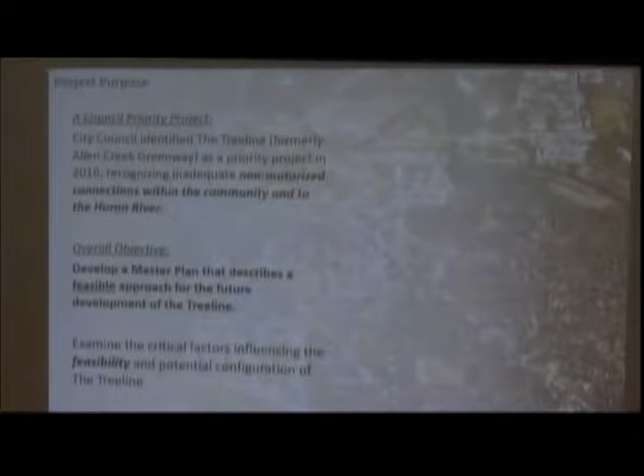What's different about this process is in 2016, City Council identified this as a priority project. They heard loud and clear from the community that this was a priority to improve non-motorized connections from the river into the downtown, into our near neighborhoods, down to the South Athletic Campus. They decided as a body to make this a priority project, put some funding towards it, and charge staff with creating a team to look at the feasibility of an approach to make this alignment go from one end of town to the other. We did a deep dive on this.

We did a lot of analysis the first year to really understand the corridor. We came into the project with a real strong community vision, but we hadn't really had the resources to understand how feasible this is to actually happen. So we're going to talk about what makes this feasible and all the steps we went through to get there.

So just a little bit about the project study area and the context. First things first, north is to the right, so that's different than most maps you see. The map you're holding in your hand, north is straight up, so two different orientations. But what you'll see up here on the screen is north to the right.

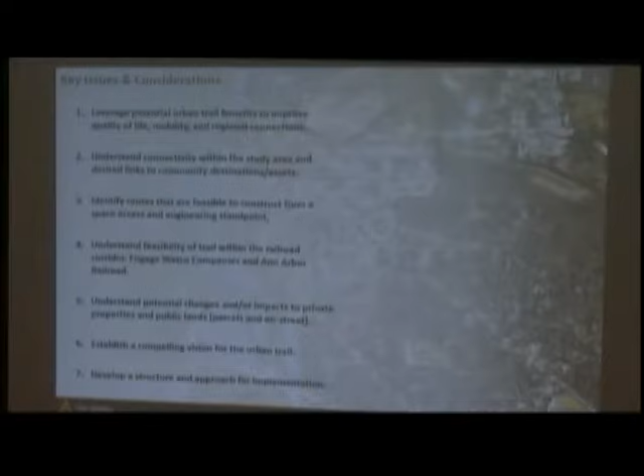So we've thought about a lot of key issues, and right from the very beginning of this project we knew that we wanted to improve quality of life in the community. We wanted to improve mobility options so that you don't always have to use your car to get from one end of town to the other. I don't know how many of you see the people walking down the rail corridor on game days. There's a real desire to get from downtown to the South Athletic Campus, but there's not a good way to do it. So we took a look at that.

Understanding connectivity within the study area and other community destinations, like the neighborhoods and parks and the border-to-border trail, making those connections. So this idea of non-motorized trails in the community is really catching on.

We're making a lot of progress with trail connections. We now have a trail connection that goes out to Matthaei Botanical Gardens at the end of Fuller Park. If you haven't been on that one, it's just newly opened and it's fantastic.

So that's making a connection to the border-to-border trail. We're working with the county to make a connection from Bandemer Park all the way out to Dexter and beyond. And all of this also connects to the state's vision of a statewide connection from Belle Isle to Ironwood, which is up in the very west corner of the Upper Peninsula. It's called the Iron Belle Trail.

So this would be the in-town piece of this broader regional connection. And that's why I think it excites the community so much, knowing that there might be the opportunity for non-motorized connections within our community outward to other communities as well.

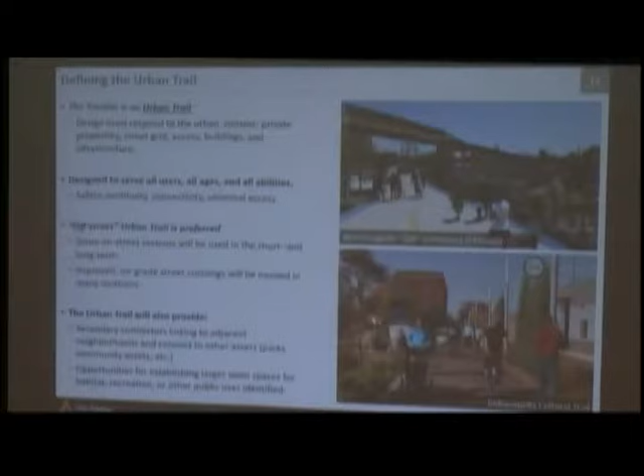Okay, so a couple big things to talk about. First, as Connie mentioned early on, this project started off being called the Allen Creek Greenway and has shifted through a branding effort that the Conservancy helped lead to be called the Treeline and identified as an urban trail. And I think that's an important distinction to recognize.

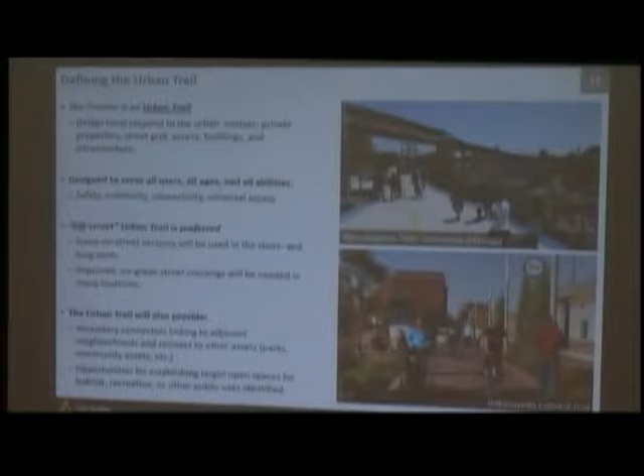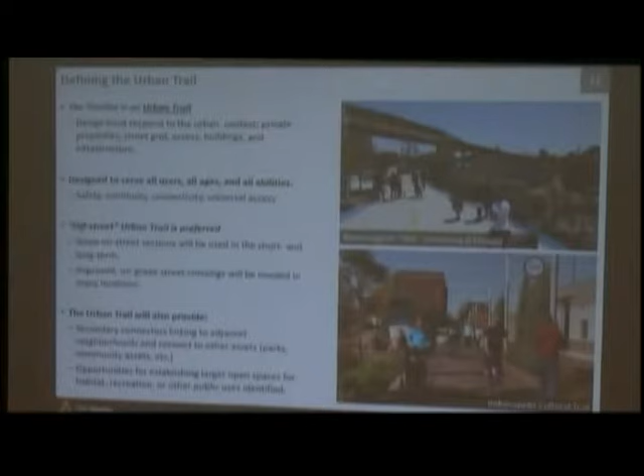While the Greenway had very good visions and still has very excellent ideas to continue to transform the Allen Creek corridor, our charge, as Connie said, was really to find that feasible route that makes that non-motorized connection. And as we talk about the framework, you'll see that this route that we've identified, there's a lot of opportunity to build other projects and other things onto that, whether that be green space or stormwater projects or a variety of other things. So we'll get to that.

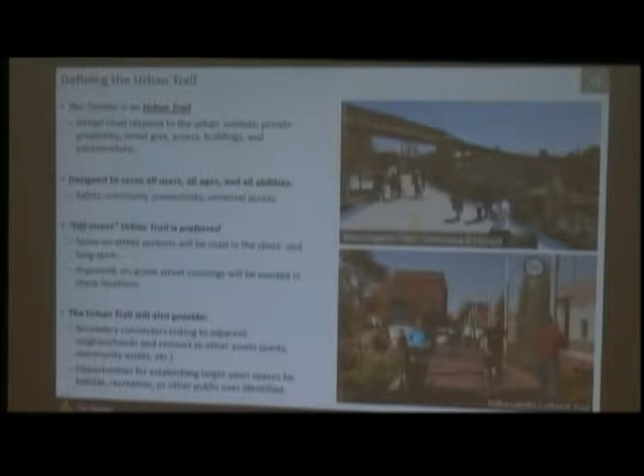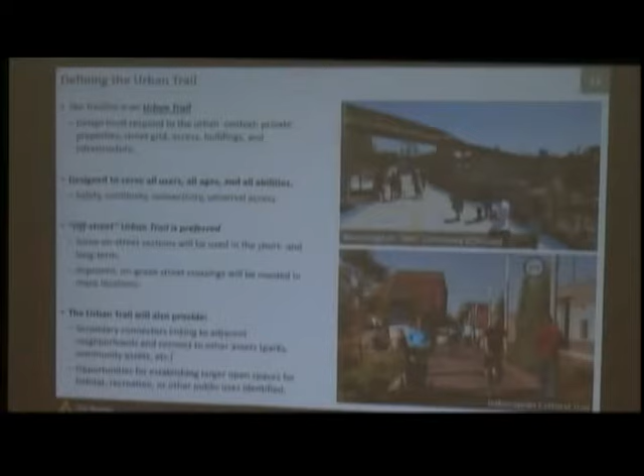Continuous experience is really critical and important to everybody involved—trail alignment to the extent possible, the trail side as well, secondary connectors, other ways of feeding and tying people into it, as well as opportunities for other green spaces or natural areas to be created along the corridor.

Throughout the process we've had a lot of questions. Sorry, I need to do this—battery change. There we go, is that better? A little bit, okay.

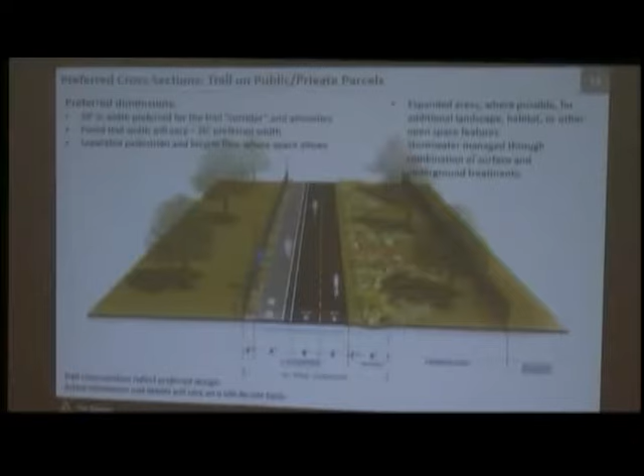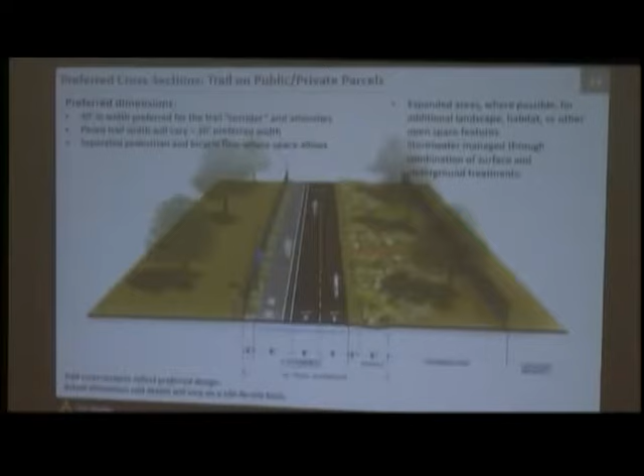As for the trail itself, generally this is envisioned to be about a 30-foot wide corridor, our preferred width. Up to maybe 20 feet of that could be pavement, including a separation of uses so bicycle traffic would be separated from pedestrian traffic. We've heard quite a bit in the community that many existing trails have conflicts—during busy times you get people going fast on a bike, other people with strollers, and there's a lot of conflict there. So having something wider is pretty important. The remainder, about 10 feet, can be used for landscaping, benches, furnishing, and lighting.

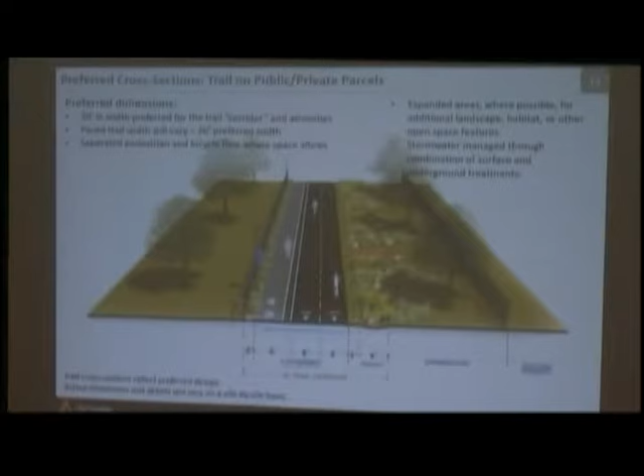Where we're able to get more access to property, there's certainly interest in expanding that and creating more green space or other amenities along the trail. As Connie mentioned, a lot of the prior plans have talked about utilizing the railroad corridor for alignment. A couple things to understand about that as we think about what we're trying to achieve from a design standpoint.

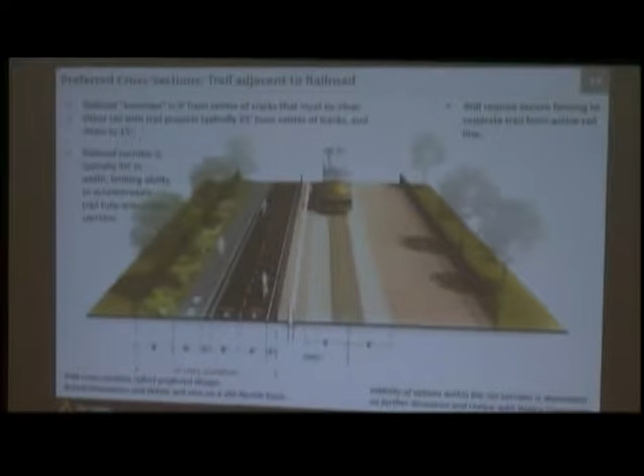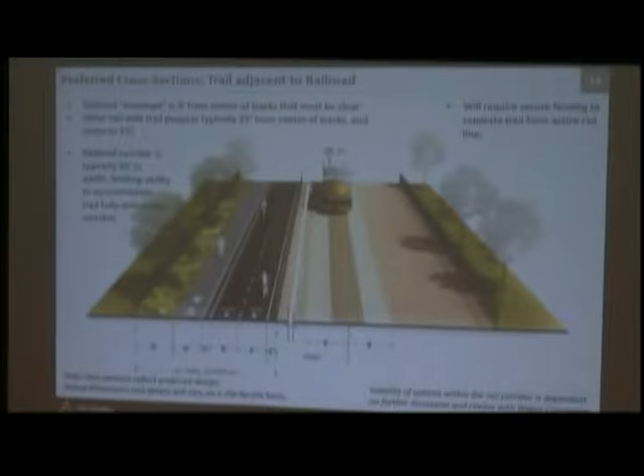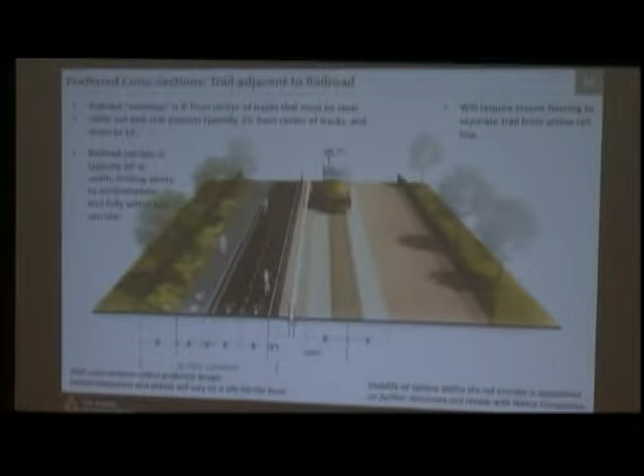The railroad corridor is generally about 50 feet wide, with the railroad tracks right in the middle. Doing the math: you need 8 feet of separation from the center of the track to either side, to be clear for trains. That leaves only about 16 feet on either side of the tracks for a trail—but we're talking about maybe 20 feet of pavement alone, let alone space for landscaping. It just doesn't fit. So looking at that, and meeting with the railroad company about their concerns...

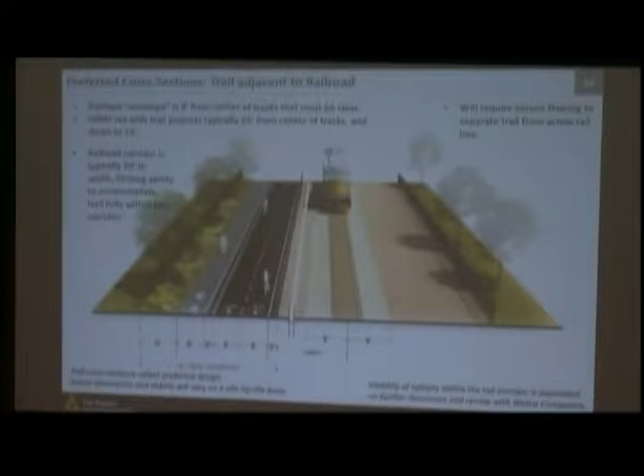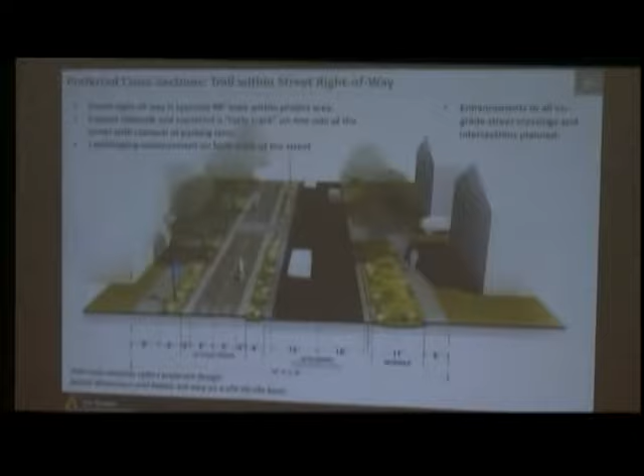You'll see reflected in the alignment a shift towards utilizing more public and private property that's often parallel to the rail corridor, sometimes encroaching a little within it, but generally outside of it in most locations. There will also likely be some on-street sections where the trail is on-street, with wider sidewalks and separated bicycle facilities or cycle tracks. This would largely require removing parking on at least one side of the road where it's built, but would also provide room for additional landscaping and stormwater management along the roadway.

The framework identifies a number of bridge crossings over some of the major roads. Within that 30-foot wide corridor, you could have a ramped section that provides a more gentle ramp rather than going up and down a flight of stairs over a bridge. It's a much more gradual ramp, so if you're biking or running, you have that continuous experience up and down. These would also provide a parallel sidewalk connection from the existing street sidewalk down to wherever that ramp meets grade, so you have a point of access to get over bridges and things like that.

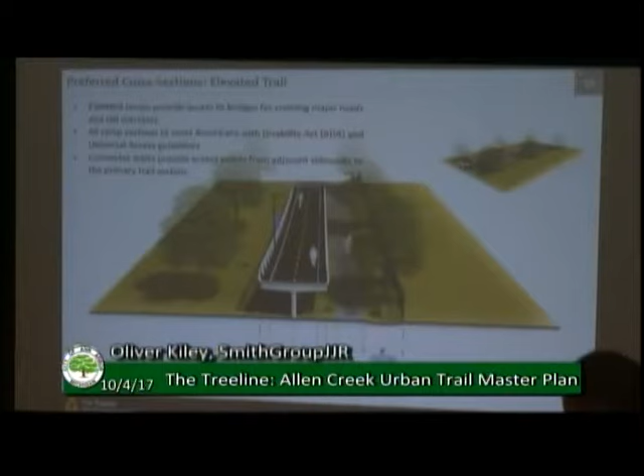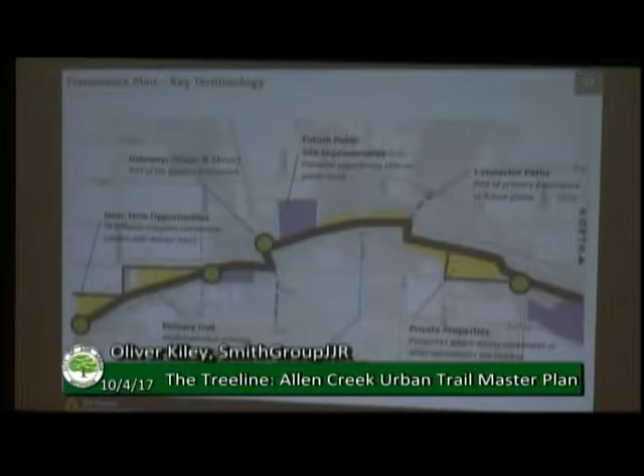The framework plan itself, there's a big version over on the boards, and we'll walk through it in more detail on the next slides. But there's two things I'll point out: big fat lines, which we're calling the primary alignment, that's the main stem of the trail, the 30-foot wide corridor. And then some thinner lines, which are near-term or alternative connections we want to keep in our back pocket. As one phase is built and we need to make a connection, there may be opportunities for near-term improvements to streets while we wait for those primary sections to be built.

So a couple of things, we're going to zoom into this map, don't worry. So there are five key things that drove the determination of this alignment.

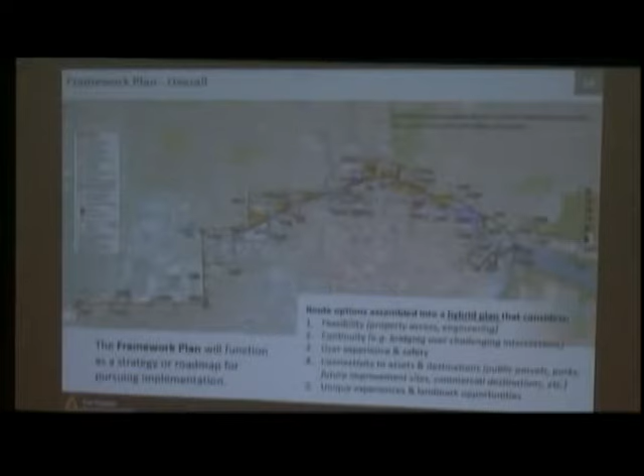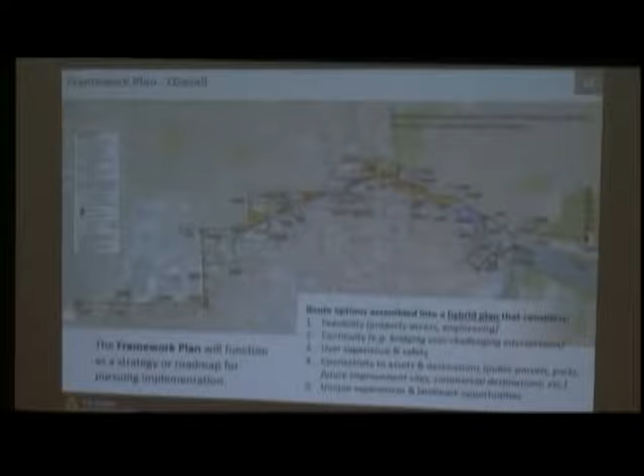As Connie mentioned, feasibility was the number one. So other than a handful of property owners, our team, working with the Conservancy, reached out and met with almost every property owner where this alignment is shown. We asked them, are you comfortable with this alignment being shown on your property? And for everybody we met with that has a route through their property, they said yes, recognizing there's a lot more conversations that need to happen as implementation moves forward. Whether a property gets purchased or the city just gets an easement, or some other change happens, that all has to be worked out, and the detail and exact design of the trail has to be understood in more detail. We've conveyed that to property owners as well.

The second piece, the big driver, was again trying to have that continuous experience so that people on the trail have lots of points of access, but when you're on it, you can just go and don't have to stop regularly. That ties right into the user experience and safety point, so we're really trying to use this trail to provide connections over some critical safety areas in town.

Getting over North Main Street, for instance, is a big one. That's a very congested area by North Main and Depot, not very friendly for pedestrians, so providing people a way to get through that is good. Being able to connect to community assets and destinations, Connie mentioned many of those earlier. And then also being a little bit visionary too, if we're going to make the investment to build this, are there opportunities to do something really unique and special along the way that creates a strong experience or a landmark for the community that becomes a source of pride and identity.

Okay, so we're going to go through a review of the framework plan in eight movements here, for those with a musical mind.

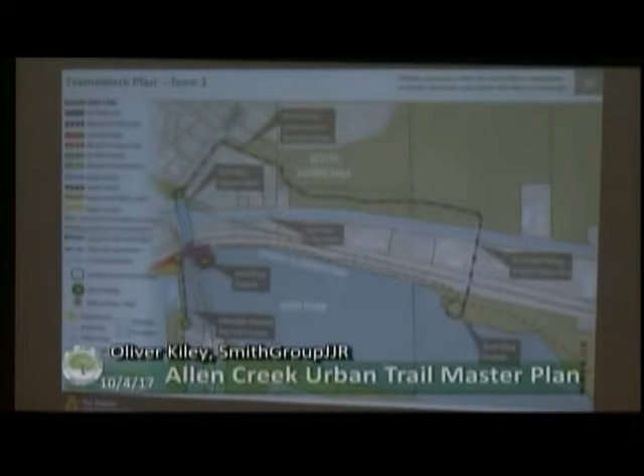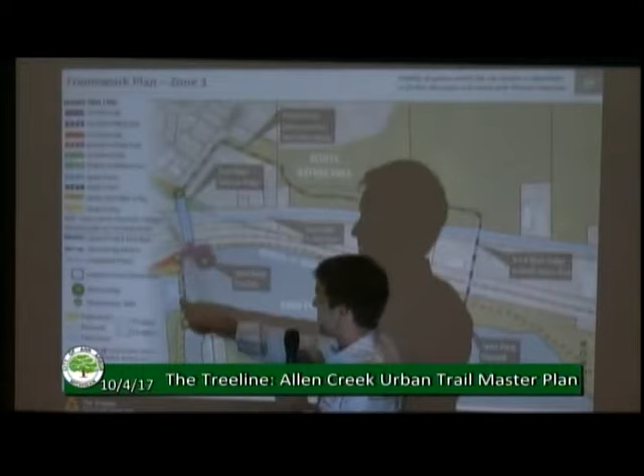Okay, so this is starting at the north end at Argo Pond, and just to orient you, this is where the Argo Dam is, and this dashed line is the border-to-border trail. I'm going to shift down and talk about the primary alignment more on the next slide. I'll just mention this one.

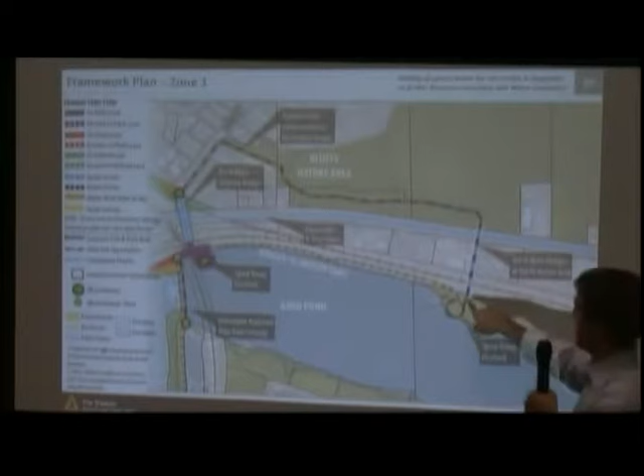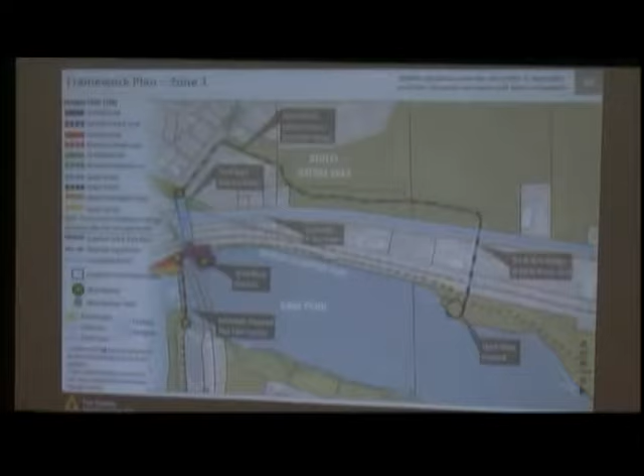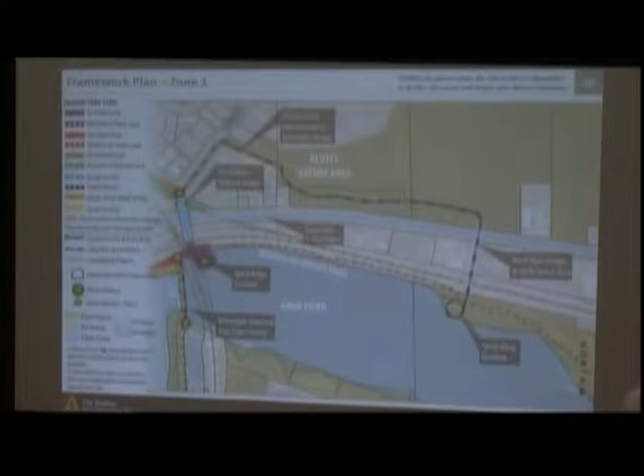This is where we have some of these thinner lines, an example of a near-term or alternative route we wanted to keep in our back pocket. This was the idea of connecting through Bluffs Nature Area. We met extensively with Natural Areas Preservation, as well as some of the mountain bikers that use that area, to figure out how that might work. But there's a tentative or potential alignment through there with a bridge, an elevated ramp section over North Main Street and over the MDOT rail line, down into Bandemer Park. That's one option should our preferred approach be infeasible.

So I'm going to start here. This is where Argo Dam comes across the existing border-to-border trail.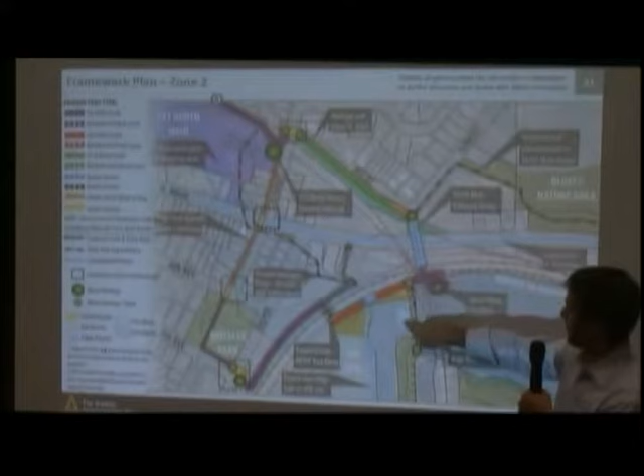What we're proposing is a ramp of some kind. The images speak to a spiral ramp idea, though there are other ways it could be designed. That would connect from the border-to-border trail over the MDOT rail line, over North Main Street, up to the corner of Wildt and Sunset.

From there, the main trail would follow along Wildt Street, parallel to the railroad tracks, mostly within the street right-of-way. We would cross Summit Street and then go into 721 North Main, a city-owned property, connecting along its west edge.

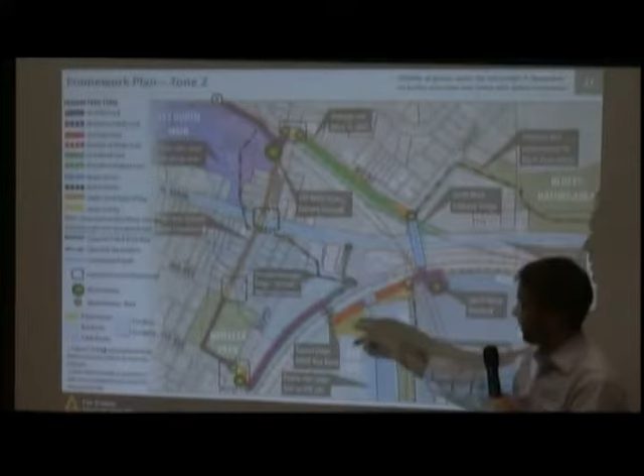There's another section of the primary trail currently in an engineering phase. You may have heard reference to the berm opening project, a floodplain management project to cut a stormwater tunnel through the MDOT railroad berm. Part of that project now looks to add a secondary tunnel for pedestrian and bicycle use underneath that railroad bridge, providing a connection to the border-to-border trail.

This comes out right by the Amtrak station on Depot Street to the east, so that's another gateway point to get people in. We've had some questions about why we'd do both of these.

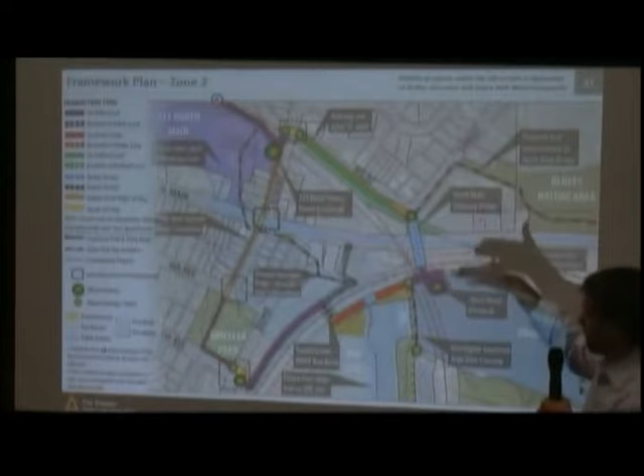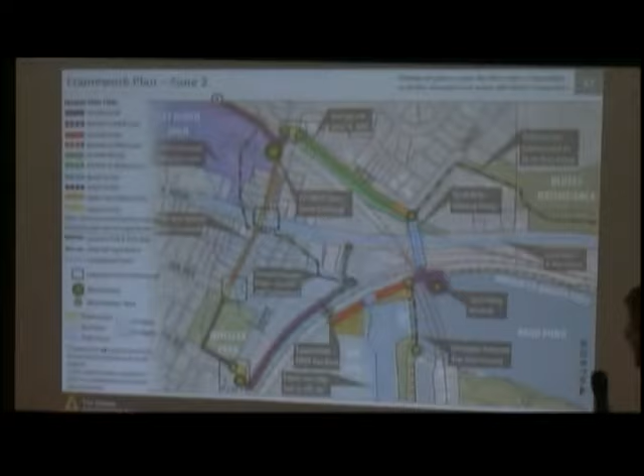One reason is that North Main Street is a very difficult road to cross. If people are coming from the east or southeast and want to get on the trail, you don't want to force them to come across here. This is a really great way to pull people in and get them on.

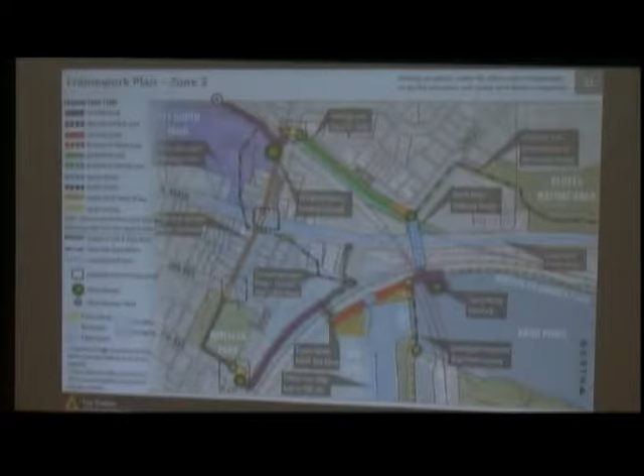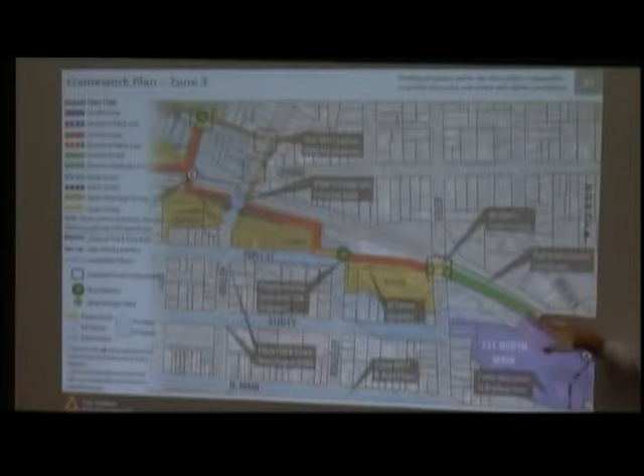Then the main branch heads south. This is the messiest page of all of these, so it gets a little easier as we go. Again, this is the connection down through 721 North Main. There's an old rail spur that runs behind, where the Ann Arbor Distillery is, and it comes down to grade at Felch Street here.

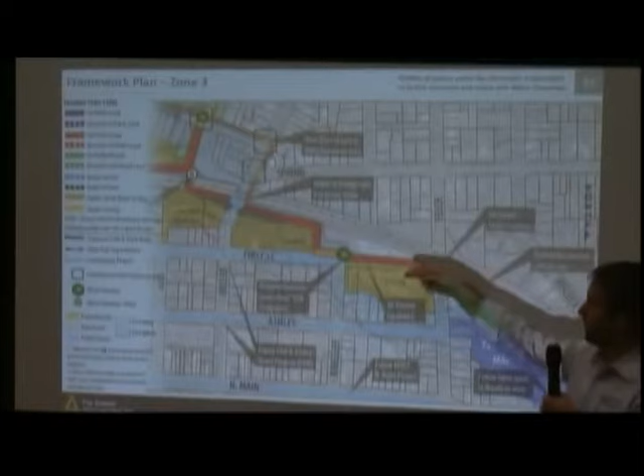We cross Felch, and this is Kingsley Condos, which has just started construction. Part of the site plan review process for that got a 30-foot wide easement for the Allen Creek Trail, the Treeline.

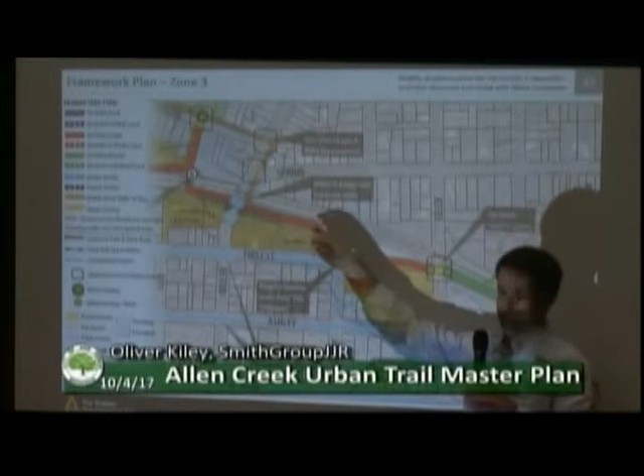I'm going to do that a bunch of times tonight, so you can laugh each time that happens. Anyway, for the Treeline we got an easement secured, so that's a piece where we already have property access. There would be a small on-street section, and then we'd utilize private property to bridge up. The dashed lines mean where it switches from on-grade to a ramped situation.

So we ramp up and bridge over Miller Street and then come back down to grade. There's been a lot of conversation about Miller—do we really need a bridge there? The rationale is that Miller Street comes downhill in both directions.

That's visibility issue one. There's a railroad bridge that blocks visibility—that's number two. And the road has kind of a kink in the direction as it changes—that's three. It's a nasty area to try and cross as a pedestrian during rush hour, so being able to bring people over that, we think, is a good way to go.

On the south side of Miller, we're looking to tunnel through with another pedestrian tunnel underneath the railroad bridge and berm, onto the west side. From there, we'd go through private property with a connection west into West Park with a crossing point, tying into the West Park trails and bringing people in.

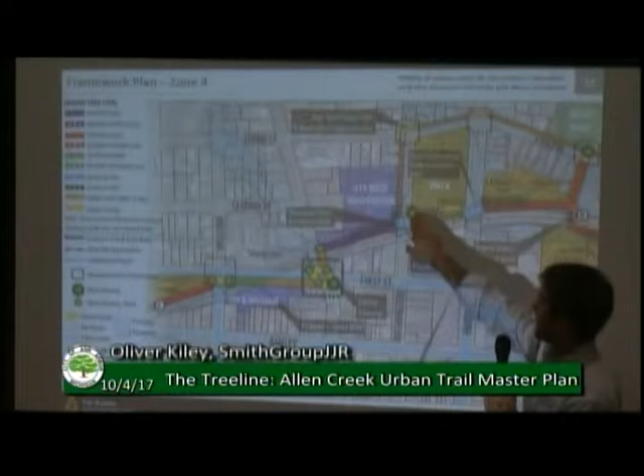The main branch continues south through here, ramps up, bridges over Huron Street, stays elevated but with some ground level access points, stays elevated past the YMCA, and as it approaches Liberty, the railroad tracks come back to grade. The trail follows that elevation and comes back to grade right at Liberty, where Liberty and First Street becomes a key on-grade gateway point.

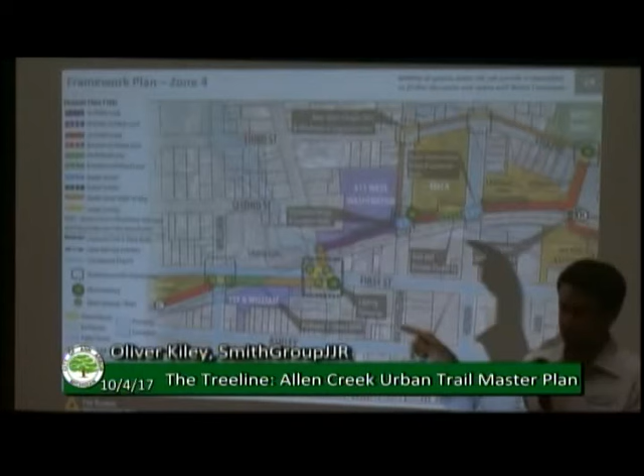That's probably the busiest road we're not crossing with a bridge, and that was deliberate, to make a strong statement for people driving into downtown. That was the closest point and a really strong point to do that.

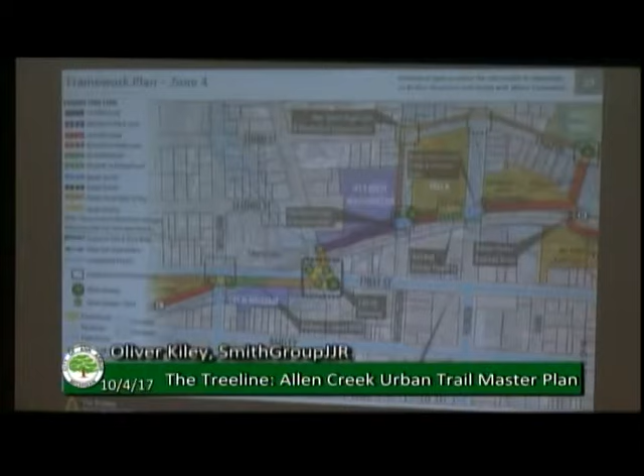The route then stays on First Street, crosses William, and goes back onto private property as it heads south through private property out onto Ashley.

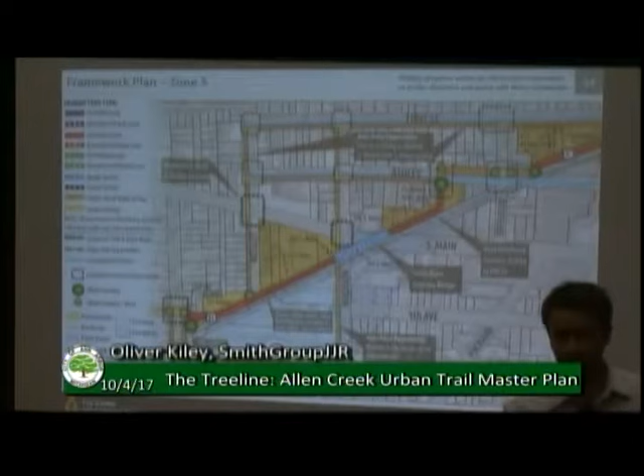It's on street for about a half a block. A new mid-block crossing would be built, and then we bridge up and ramp over Madison and Main Street and South Main Street, dropping back down to grade at Mosley. As part of this construction, the city got a 15-foot wide easement for the trail, which combined with a small sliver from the railroad property gives us enough to build the trail through there.

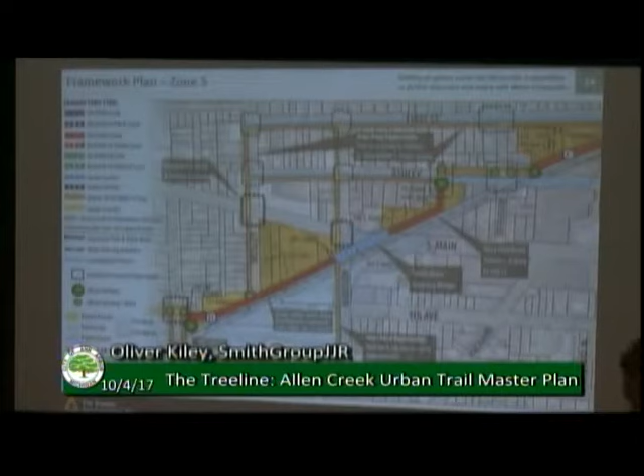It then goes on grade through property out onto Hill Street. From Hill, there's a new crossing improvement at Green out to this intersection, which could be improved. This is a massive intersection at Green and Hoover. Once we clean that intersection up, we'd go east down Hoover on street to State Street, then head south towards Stimson.

Even though these are on-street sections, one key improvement we can link in is improving those pedestrian crosswalks. In the South Burns Park neighborhood, a lot of students, faculty, and residents try to cross State Street, and during busy times that's a challenge. So improving that corridor isn't just about moving along it, but crossing the street is important too.

This would continue south to the ending point at State Street and Stimson, down where the Salvation Army is, just south of the Stadium Bridge.

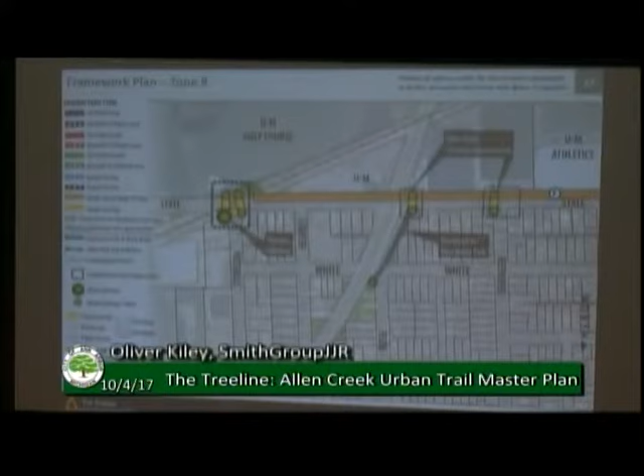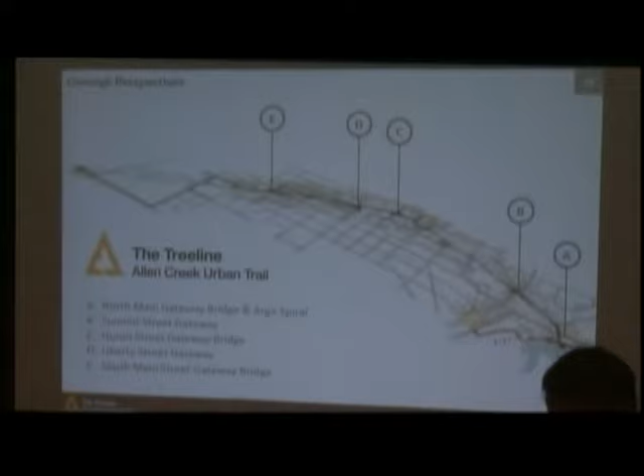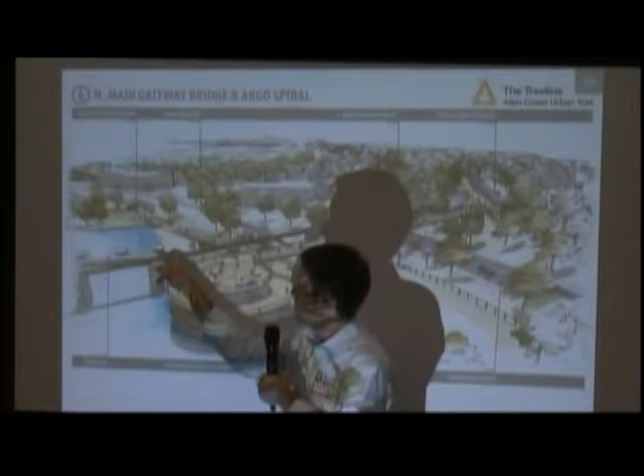I'm going to go through these fairly quickly. These are some illustrative drawings showing what the trail could look like. Point A is looking at the trail up by that spiral ramp in Argo Pond that crosses over the MDOT rail line, crosses over North Main Street, and connects up to Wildt Street at Sunset. Then this would be the border-to-border trail down at grade. Here's the Argo Bridge, Argo Dam, and then that bridge with the tunnel underneath the MDOT rail line—that's a shot of how that could look.

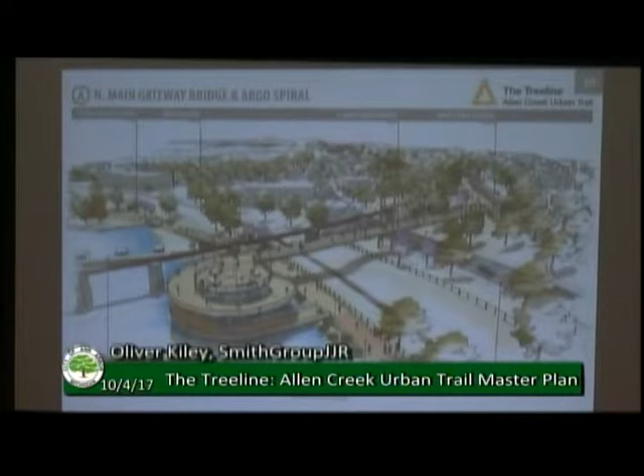One idea is that these gateway bridges could be signature elements depending on how they're designed, appearing in similar or different ways at other key crossing points and gateways into town.

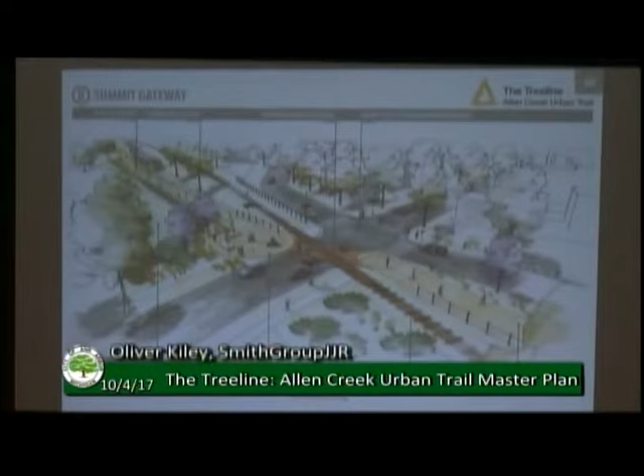This was a smaller node, looking at the Summit Street and Wildt Street intersection. The main branch of the path would come through, cross the street, and then go through 721 North Main Street.

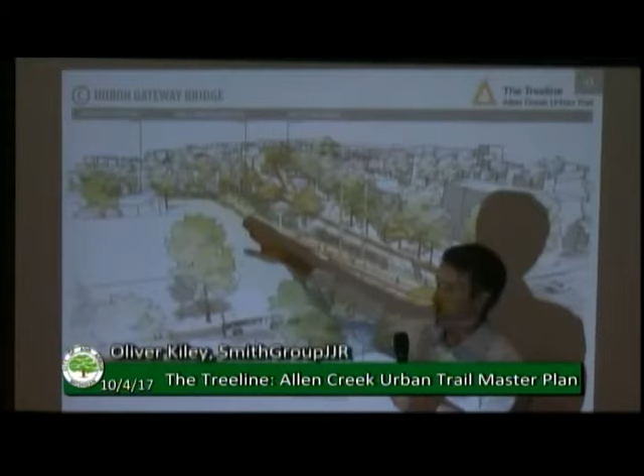This is the bridge if you're up on the track at the YMCA looking north, kind of out of the window—this is what you might see. This is Huron Street down below with a bridge crossing over Huron. In some cases there may be stairs to provide access; this could also be a sidewalk or ramp that ties back in. That's something that will be worked out from a design standpoint in future phases. You can also see a connection on the left out to West Park and the Miller Bridge a little bit in the distance.

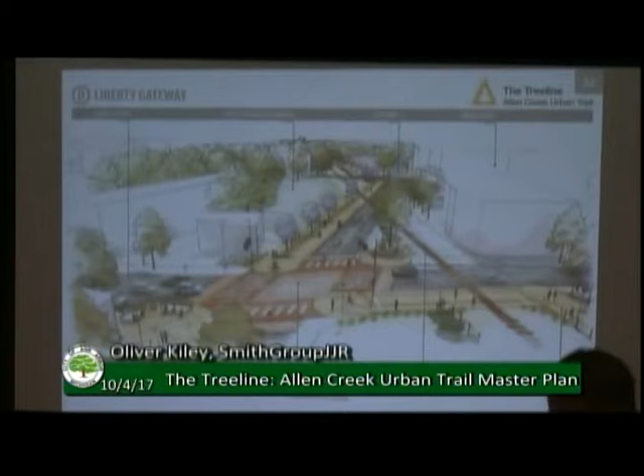Here's an idea for that on-street section and gateway point down at Liberty—starting to take that street intersection and make it feel more like a pedestrian-oriented space. A lot of communities are building raised crosswalks or raised intersections with special pavements and other treatments to make them very safe for pedestrians and slow drivers down. There's a variety of designs for that.

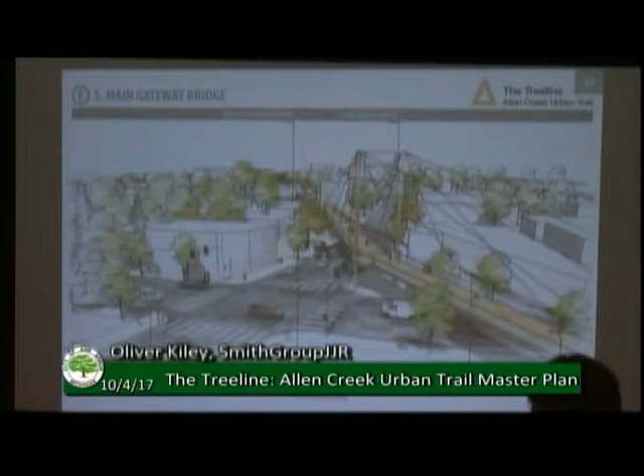Lastly, the bridge looking north at South Main Street at Madison. That bridge comes up and articulates a few times as it moves through that area to avoid buildings and things like that.

Okay, a few more slides just on the implementation side of it, and then we'll be done shortly.

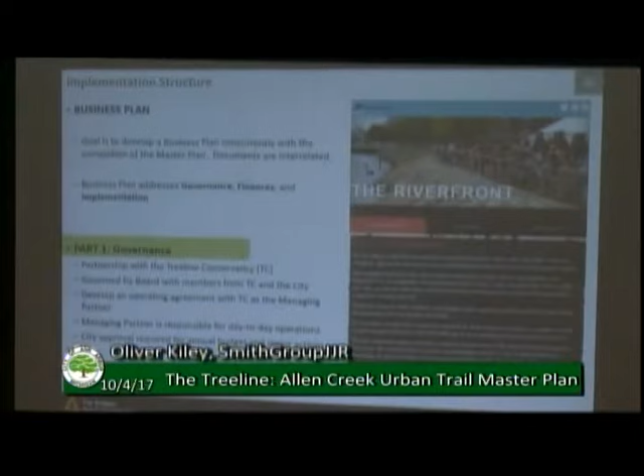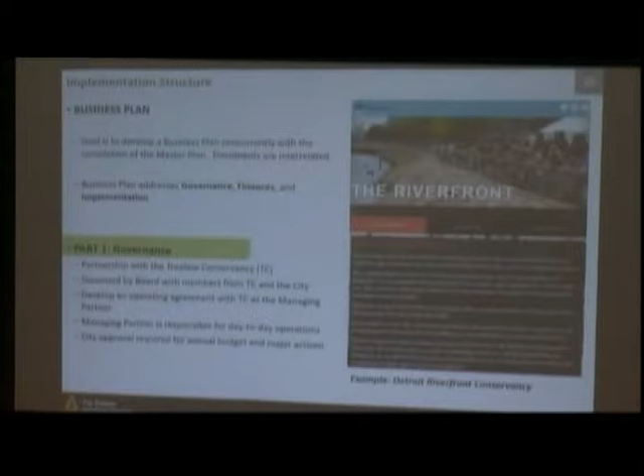As Connie mentioned, the Treeline Conservancy is working with the city to figure out a partnership arrangement and put together a business plan for how to execute this vision and make the Treeline happen. This is very similar to how many other major urban trails in other communities are built.

Closest to home is probably the Riverfront Conservancy in Detroit, which was responsible as a public-private partnership for building the Riverwalk along Detroit. Subsequently, they started building the Dequindre Cut, a couple mile long non-motorized trail connection to some key destinations in Detroit. In that situation, the Riverfront Conservancy was responsible for fundraising, design, and engineering, and they have operating and management agreements and requirements for how to manage and maintain it.

The city and the Treeline Conservancy are looking to figure out the set of roles and responsibilities that the Treeline will play in making this vision happen. Part of their business plan is this governance structure piece, which identifies the roles and responsibilities of the city versus the Treeline and how that works.

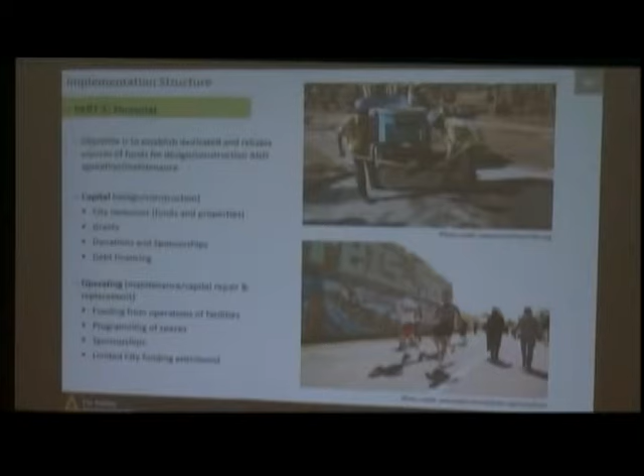A second component is the financial side, thinking about not just the capital cost needed for construction of the different phases of this project, but also the ongoing operational costs. Who's maintaining it, who's managing it, who's paying to keep the pedestrian lights and street lighting going along it? All of those kinds of things need to be considered in this business plan.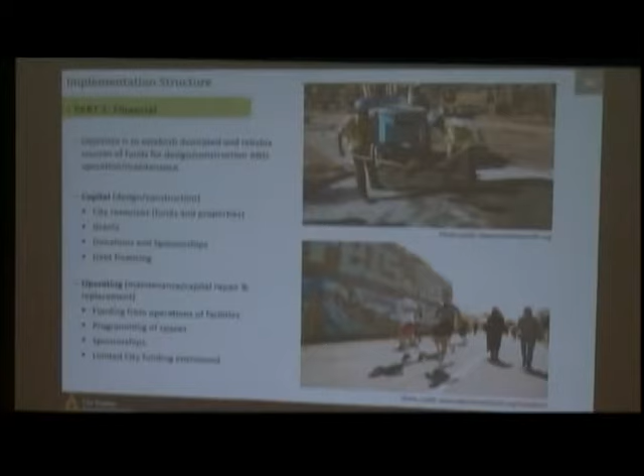That said, the Treeline Conservancy is looking at a very broad range of funding opportunities for this. It could be grants, donations, sponsorships.

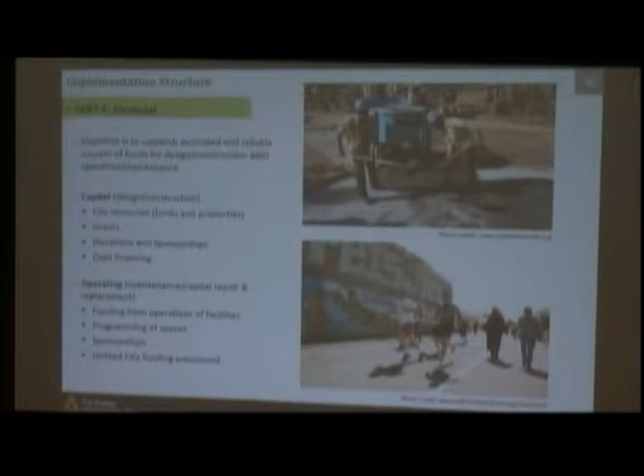I've lived in Ann Arbor my whole life, and I can say Ann Arbor doesn't have a strong history of asking for money as a community to fund projects. When you look at other communities like Detroit or Grand Rapids that fund large public projects, it really takes a lot of different interests, constituents, and groups pulling together to figure out how to do it.

So those details aren't worked out yet, but those are the things the Treeline Conservancy will be looking at.

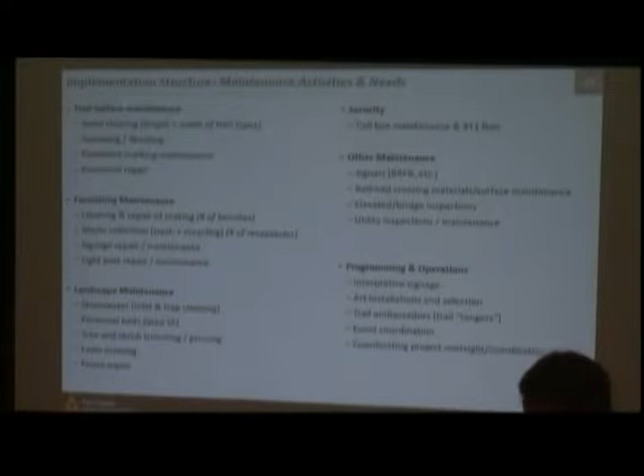This is the most boring slide of the evening—very important, but I'm not going to read through these. Suffice to say, there's lots of management and maintenance kinds of things, enforcement, all that stuff that needs to be considered in this plan. And then lastly, it relates to the implementation strategy.

How is this really rolled out? How is this process phased? We recognize that building this whole trail, about 2.7 miles long, is a lot to bite off in one piece. It'll very likely be phased in increments. So what does that phasing strategy look like?

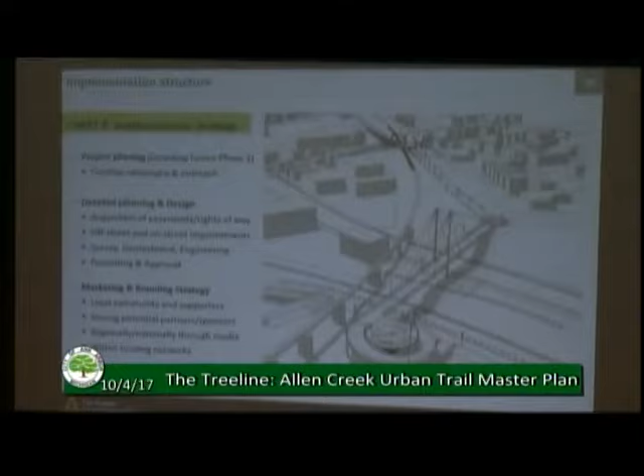Again, it means reaching back out to property owners and figuring out, here's what we're proposing, here's a more detailed idea, how do we come to an agreement with property owners. That's all part of the next phase of implementation and moving that forward.

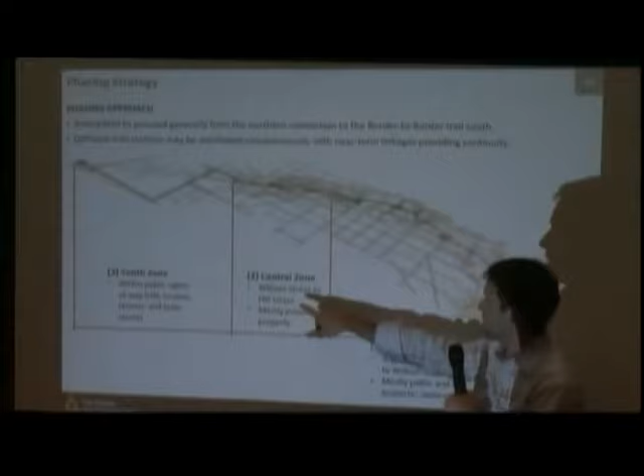That said, we have put some thought into the phasing approach for this. Generally speaking, the north zone goes from the spiral ramp connection, includes this connection out to Depot Street, and then goes south to about William Street—that's the first phase we'll look at implementing. The second phase is mostly combinations of private property, going from William to Hill. And Hill Street South is entirely presently planned to be within public rights-of-way.

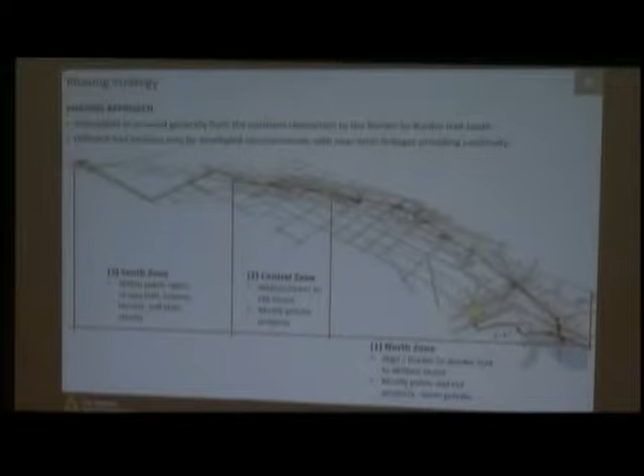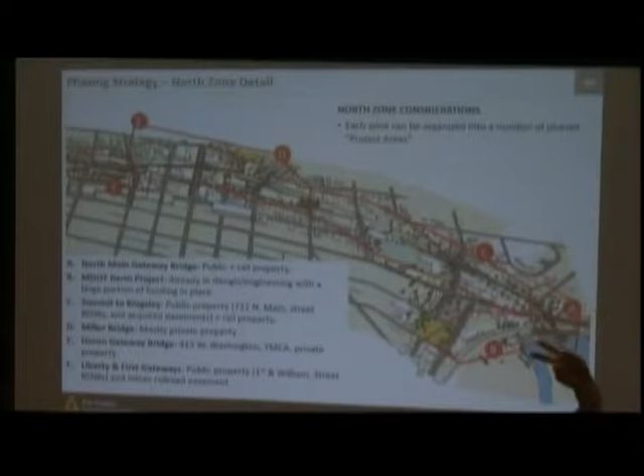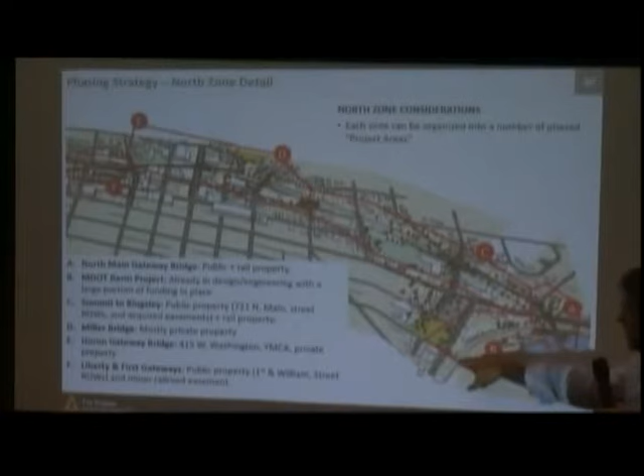As we look a little more at that north zone in detail, we've started thinking about how these different project areas can be established and set up, and how some of these can be advanced, with near-term connections providing a linkage between them as they move forward. This project has already received FEMA grants and funding and is in an engineering and design phase right now for this linkage. The thinking is that building this section next would provide a critical and immediate access point over North Main and get people to the riverfront—that's a key piece.

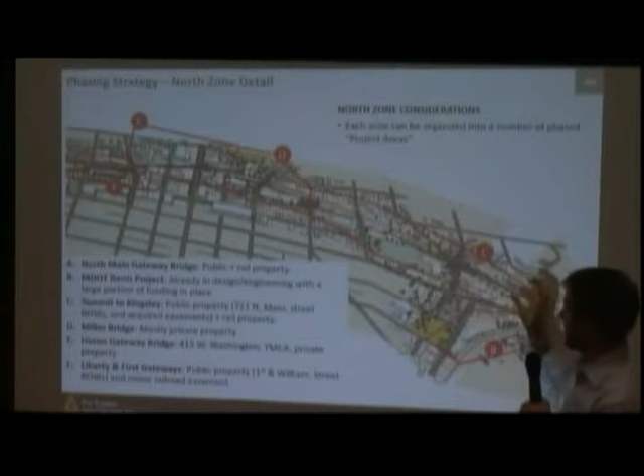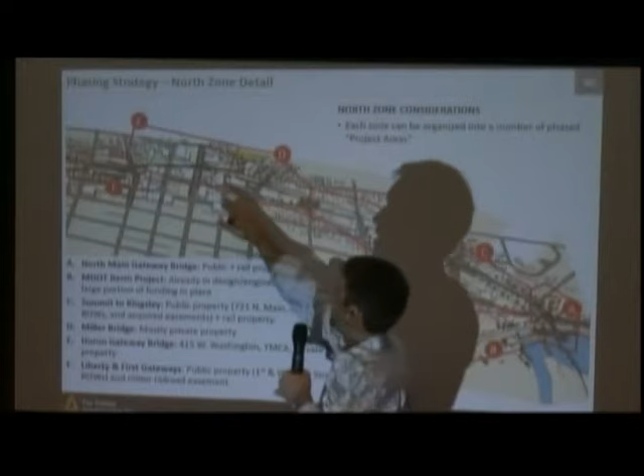A lot of Section C is either public land, public right-of-way, or rail property, so there's a limited number of property owners to work with to build that section. Section D has a bit more private property, as does the section that includes essentially the Miller Bridge. Section E has the Huron Gateway Bridge, and Section F is again within public rights-of-way. So that's how we're thinking about it.

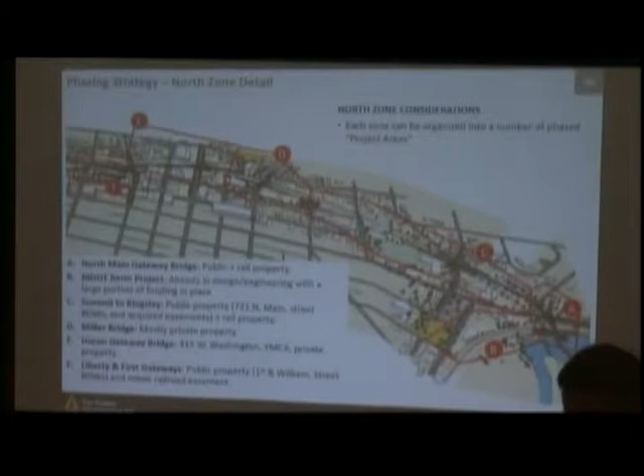This has certainly been a topic of conversation in terms of the cost for the project. You may have seen the $55 million number discussed, kind of in the middle of that range. So a few things about that—this is the list of physical design elements that cost number includes.

That's a construction cost estimate—all of the physical stuff built for the Greenway. It does also include what we call soft costs: contingency, design fees, engineering fees, permitting, all those kinds of things. It does not include property acquisitions, costs related to easements, environmental cleanup, or other utility work that the city wants to piggyback onto this construction.

As we think about what this project costs relative to many of the projects we benchmarked against, it's kind of in the middle of that range. The 606 in Chicago is a recent project that opened, very similar length, almost all elevated trail along the top of a berm.

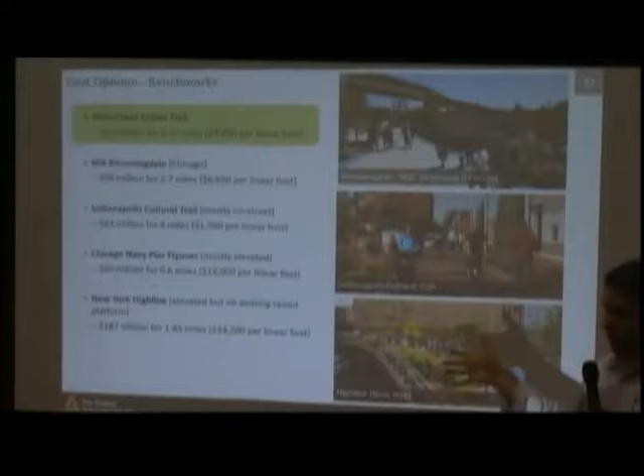That was about $6,600 a linear foot. A lot of people have asked about the High Line, and we put this in here not to recreate or mimic the High Line or import it into Ann Arbor, but just to put the cost number in perspective. That was a super expensive project, and the elevated structure was already built, so that didn't even include that.

So where are we going next with this? As I mentioned, Oliver and I are on the presentation circuit. We've been going to all the boards and commissions talking to them and asking for their support for the project. We have dates that need to be confirmed but tentatively planned for a Planning Commission public hearing on November 8th.

And then City Council action on December 18th. So anytime we adopt an element of a master plan, it has to go through both bodies, Planning Commission first, and then on to City Council. So we hope by the end of the year both bodies will take favorable action on this, and we will have a new element of the city's master plan.

Concurrently, last month we distributed a draft plan, which is available for everyone to see on the city's website. We sent it out to adjoining jurisdictions to get their comments, and we will fold their comments into our final presentation and public hearing to Planning Commission, and that will conclude this.